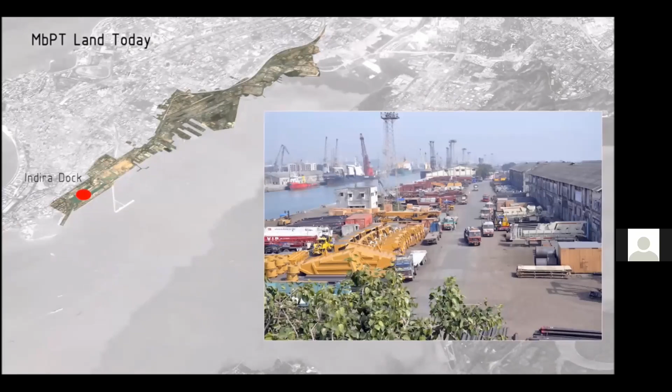Mumbai port from this area. Now this is the Gateway of India, and this is the Ballard Estate where the Mumbai port office is there. This is the Indira Dock, and this is the Elphinstone Estate with old godowns and slums. This is the Wadi Bandar area, and this is the Darukhana area where the slums have been there. This is the condition of the water body there.

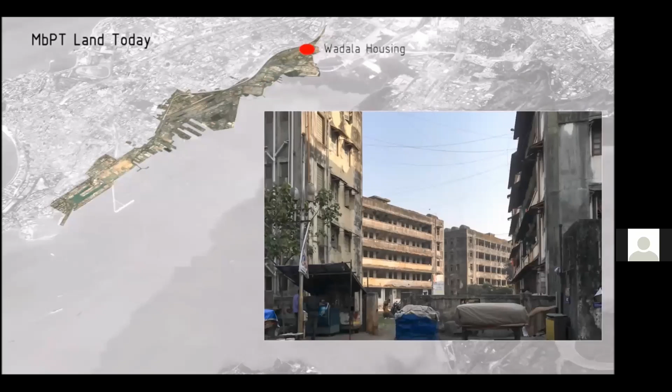These are the old godowns, dilapidated godowns, slums along the roads, and these are the dilapidated godowns now not in use today. This is the level of infrastructure there, and this is the Shivdi Fort, and this is the old colonies of the Mumbai port. They are not in use. So this is the condition, today's condition.

Now the vision is like that. This is the Sasun Dock. Gateway of India.

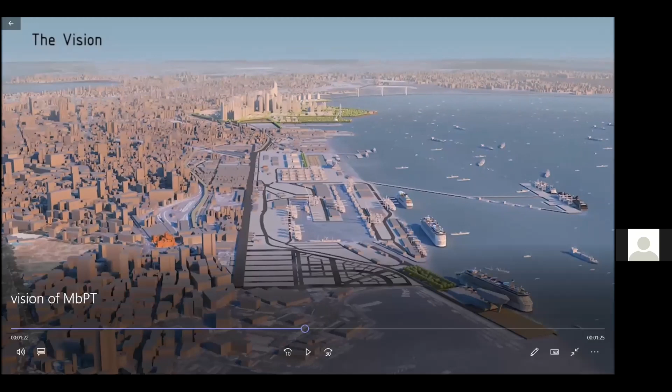First is the cruise terminal, which is developed in the Indira Dock near the Ballard Estate. That operation of the cruise has already started. This is the Indira Dock area.

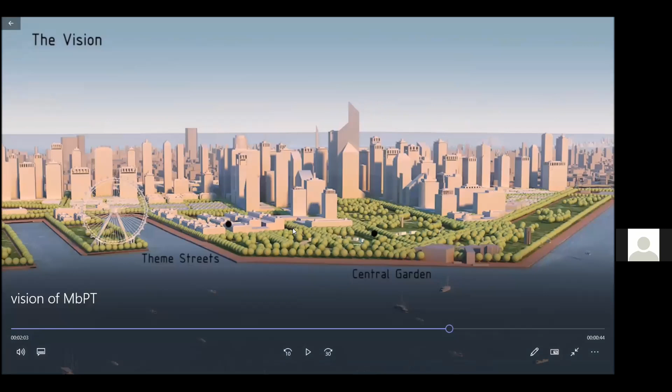Developed along the waterfront, and this is the high-tech city. A ropeway is also planned along the Haji Bandar, which will go to the Elephanta Caves, and a large park of additional area has also been proposed in this area.

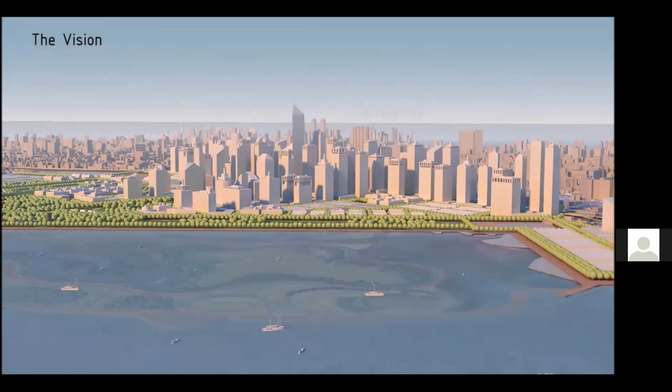This is the MTHL being constructed by the MMRDA, and this is the eco park Mumbai Port wants to develop near the MTHL behind the Sewri Fort.

This is the Wadala Healthcare Zone where the existing hospital is being converted into a super specialty hospital. And this will be the overall view of the township of Mumbai. Now let's go to the details of the projects.

First is cruise tourism. The Government of India appointed M/s Bermello Ajamil to study the growth of cruise terminals in India. After their study, it was found that India has a potential of 4 million passengers, out of which 80% will come to Mumbai only. Out of this population, 70% will be Indian citizens, and the remaining will be international passengers.

This cruise tourism will generate about 29,000 crores to the economy and additional employment of 2 lakhs in Mumbai itself.

Mumbai Port has already started the international cruise terminal at the Indira Dock, and last year around 160 cruises called there. This year we were expecting about 350, but because of COVID-19, the entire movement has stopped.

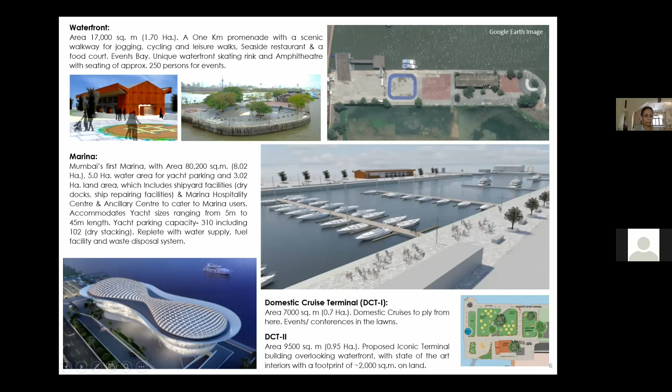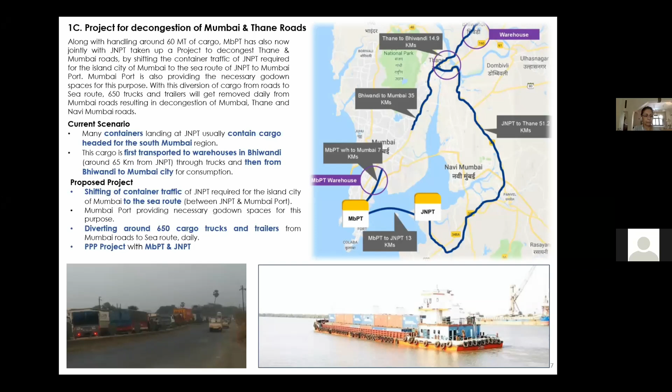This project will also be implemented as a PPP project, and the process for appointment of the operator is underway. Now, out of the total area along the eastern waterfront, which is about 811 hectares, 558 hectares of land is already developed, such as Ballard Estate, Elphinstone Estate, and Wadala area.

We could carve out about 253 hectares in the Darukhana area for redevelopment purpose. It will be developed as an independent township. This area will provide water transportation facilities, lung spaces, iconic gardens, and large-scale employment to the city of Mumbai.

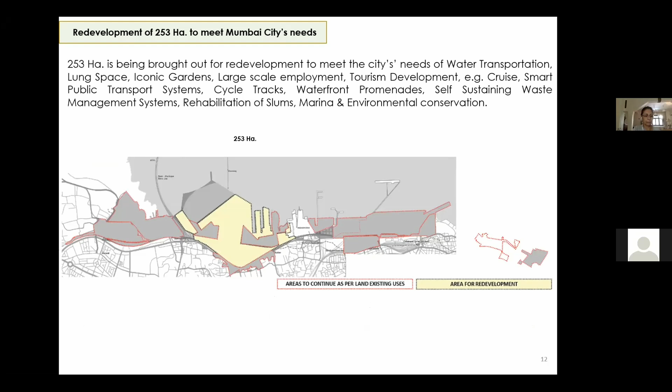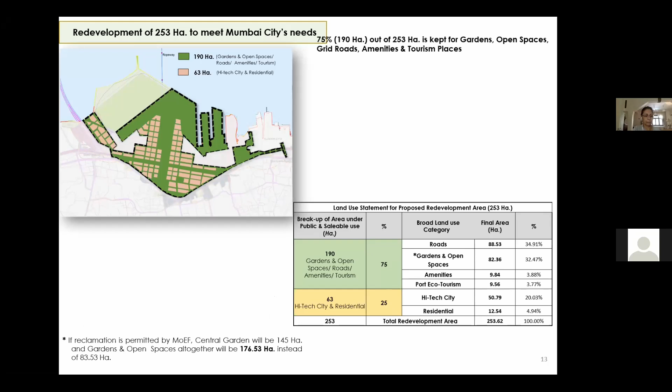This is the general master plan for this area, where a lot of open space and gardens have been provided. You can see nearly 70-75% of the land is proposed for gardens, roads, open spaces, and amenities, and only 25% land is for the high-tech city and residential purpose.

One of the key features of this township is the development of the central garden of an area of 145 hectares. Part of the land is already landed area, and part of the project land will be reclaimed from the low-lying area. Approval for the development will be taken from the environment department.

The entire design of the garden has been completed. There are nearly 31 elements in these gardens. This is going to be a very unique garden in the entire region.

The elements include a 12 Nation Park of the Alliance, where land will be given to various countries who will develop their own style of gardens in this area. There will also be a War Memorial Plaza, a bandstand, play area, and urban forest.

The ropeway station is also located within this garden itself. A plot of about 1 hectare has been identified for it.

There will be an artificial lake created, which will have replicas of seven islands of Mumbai, accessible by boat. Then there will be a spiral tower viewpoint and vanishing points. All this design has been completed, and in the first phase the land is already available.

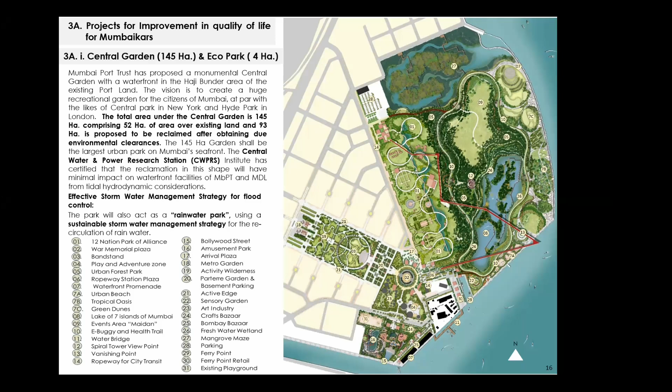Apart from the central garden, we are also developing an eco and mangrove park behind Shivdi Fort. We observe thousands of flamingos coming there, and people come to watch them, but there are no facilities as such. So, to make this a tourist destination, a mangrove park has been planned where nature trails and boardwalks will be constructed on the mangrove area with viewing gallery towers. There will also be an interpretation center, a mangrove museum, miniature models of mangrove species and wildlife in the area, and ample parking has already been identified.

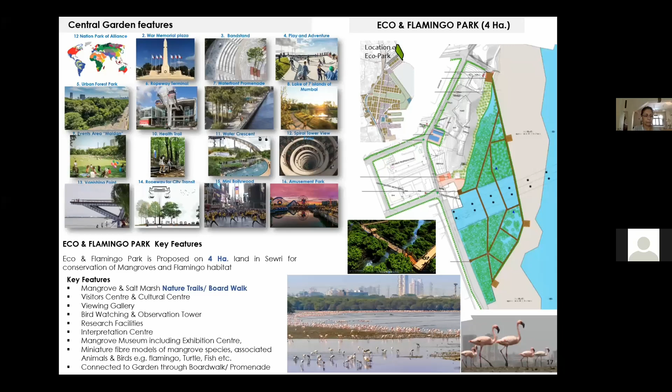Detailed estimates and tender documents for the first phase of development, costing about 10 crores, have already been completed, and it will be implemented by MbPT only. We are just waiting for mangrove cell approval. MCZMA has already approved the project, and as soon as we get the mangrove cell approval, we'll start implementing the same.

In the entire plan, we have proposed about 11 kilometers of waterfront promenade, right from Wadala to the Victoria Dock, except the MDL area, where it will be disconnected. Otherwise, it will be a continuous walkway of about 11 kilometers.

This 11 kilometer promenade will have gardens, a children's plaza, food court, and a continuous walkway. There won't be any vehicle movement, but cycle tracks can be there in certain areas of the promenade. For example, the Marine Drive is about 3.5 kilometers, whereas our promenade will be about 11 kilometers in total length.

In the Central Park, as I said, the longest ropeway on the sea has been planned, which will be connected to the Elephanta Caves. The entire design has been completed, the DPR is ready, a plot of 1 hectare along with parking has been identified, and a bid has also been floated for the development of the ropeway through PPP mode.

This DPR says that initially about 4,000 passengers per day will come, and it will go up to 15,000 passengers per day, with a total travel time of about 45 minutes from Mumbai to Elephanta Caves.

However, we are waiting for approval at the Elephanta side.

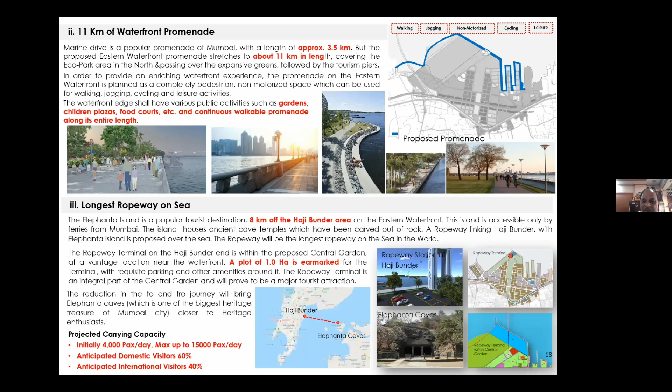Another road is about reading streets, where libraries, bookstores, etc. will be there, and the street will host a lot of books.

Then there will be Bollywood streets. Mumbai being the center of the Hindi film industry, there will be studios and recording areas that can be used for various events related to films and music.

Another street will depict the rich tradition and culture of Maharashtra, where traditional dance forms like lezim and fugdi can be performed.

And most important is the multi-cuisine street, where all sorts of food will be available with food courts, restaurants, and street foods. Everything will be available.

Since the area is connected with the overall tourism area like Central Garden and theme piers, this will become a major destination for people to visit.

This entire development needs a very good public transportation system, so that people can come easily, and evacuation should also be possible.

This area already has good connectivity, as the Harbour Line suburban railway already passes to the west of this area, from Wadala to CST.

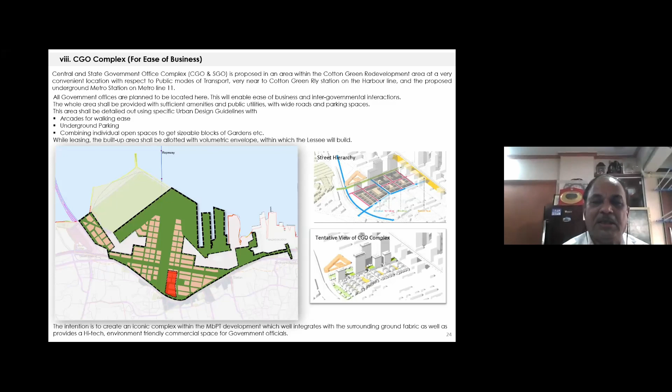Everything will be provided. Various types of plot area and built-up area have been assigned.

MbPT has already received a lot of demand from various organizations for office space, so accordingly this project has been planned.

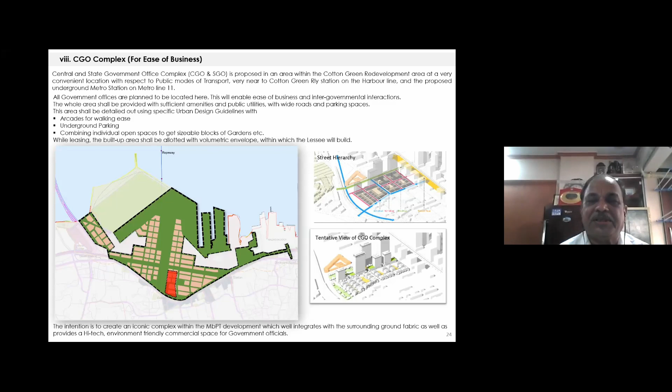The main component of this is the high-tech city, which will be developed over several sectors of area - residential, commercial purposes, all the facilities - and this area has been planned around the central park.

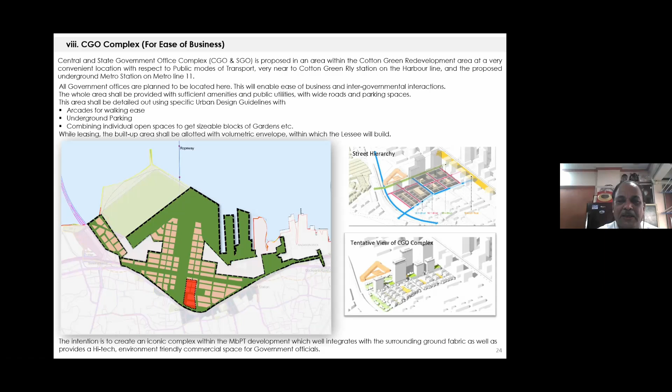It will be connected with the metro station, and all the other transit stations will also be connected to this area. This entire area has been planned on the form-based code.

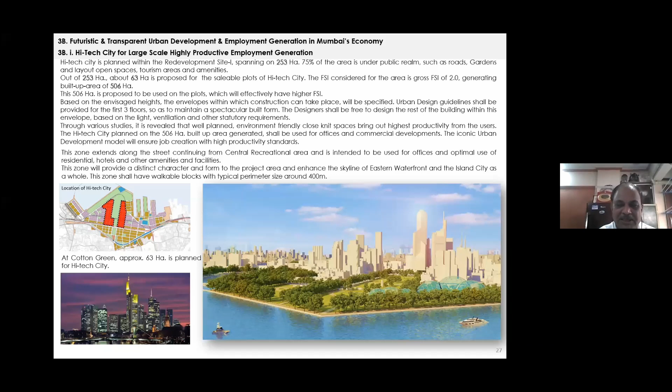The DCR specifies the form of the building which will come on the plot - the total form of the development, where high-rise buildings will come on the transit stations and it will taper towards the water body.

The major emphasis will be on pedestrian and cycle movement on all the roads, with arcades proposed along through the gardens. All the transit stations will be connected by pedestrian pathways, leading to the central park.

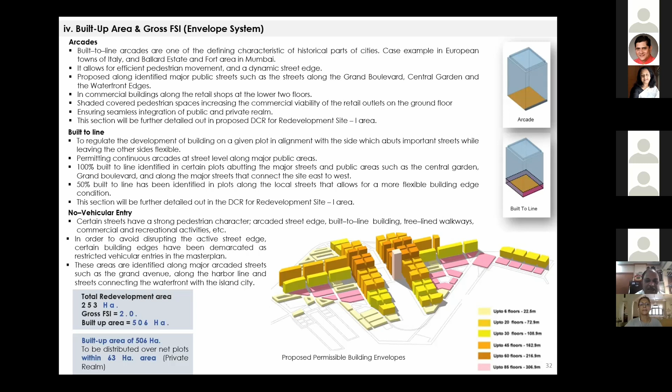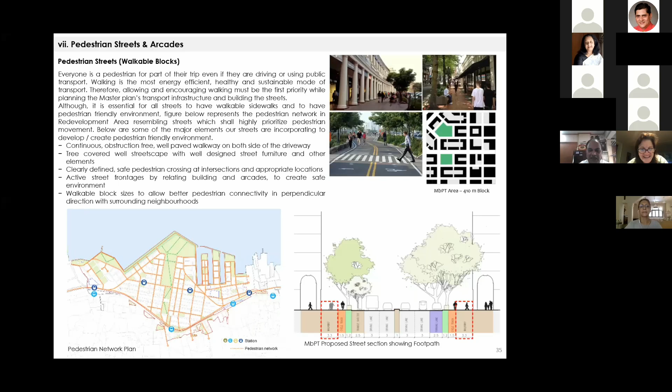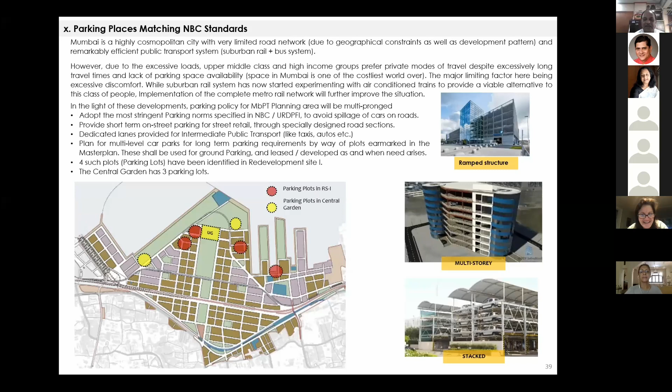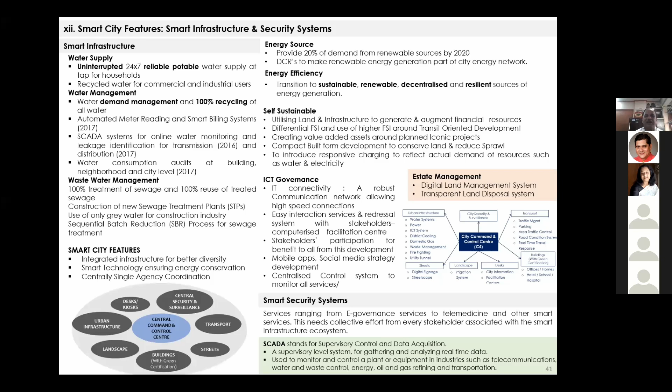New Sassoon is being developed by the MFDC, and the old Sassoon plans have been prepared to make it a fish tourism area with gardens, restaurants and food stalls. A medical center has taken over this hospital, and the work has already started.

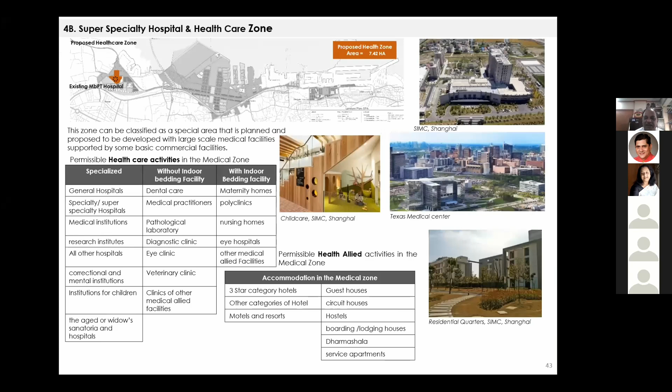Another important project is the development of Kanhoji Angre Island. It falls under the CRZ, and no construction is permitted as of today. However, gardens, pathways and trails are being constructed by the MbPT in this area. After the application of the CRZ notification 2019, certain areas will be released from the CRZ where minor construction will be allowed, making it a major tourist destination.

Now coming back to the museum side, we explored 4 locations for the museum: the clock tower, the watchtower, a building near the Orange Gate, and the new reservation master plan.

This is the clock tower building along the P D'Mello Road. It is a very old heritage building, but needs substantial repairs. Presently the area is within the dock area and the bonded area, and it's not accessible to the public. There is no direct access from a public road, and a separate plot can't be carved out because there are two roads parallel on both sides carrying truck movement for cargo, and no space for parking. So presently a museum is not possible in this building, though some future decision can be taken depending upon cargo movement.

Another option is the watchtower at Victoria Park, which is being developed as a mini museum. This watchtower has been renovated along with the domestic cruise terminal.

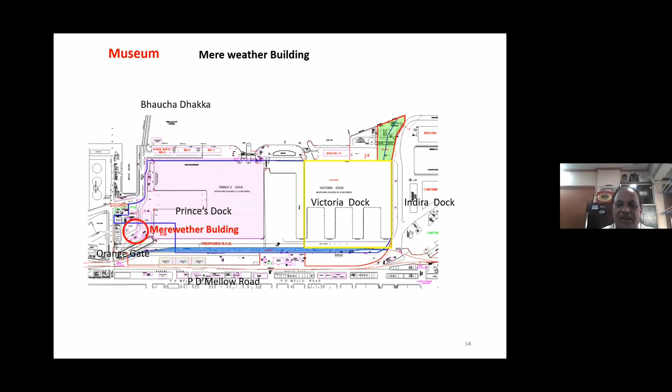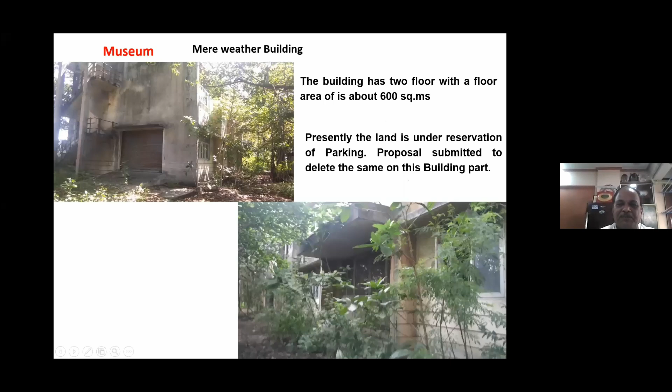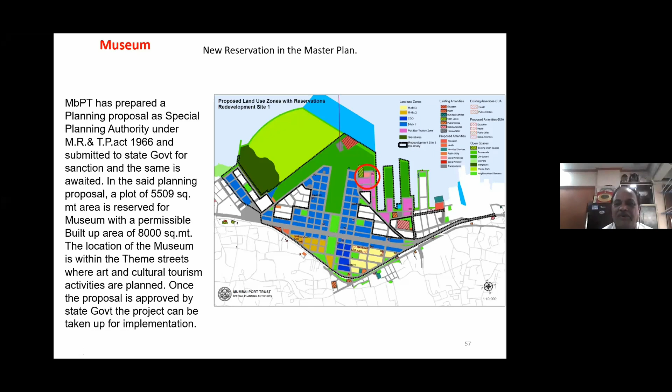This is the plan of the building. It is well connected, within a distance of about 500 meters from the metro station, which is at the center of the garden, and from there we can just travel by walking to reach the museum area. The land belongs to the Mumbai Port and is in their possession, so as soon as the plan is approved, necessary steps can be taken for development of the museum.

This is that plot - this is the Maritime College, Marine College, and this is the plot we have proposed. This is the central garden, and this is the tourism area. So we are ready for that plot, subject to the approval of the government.